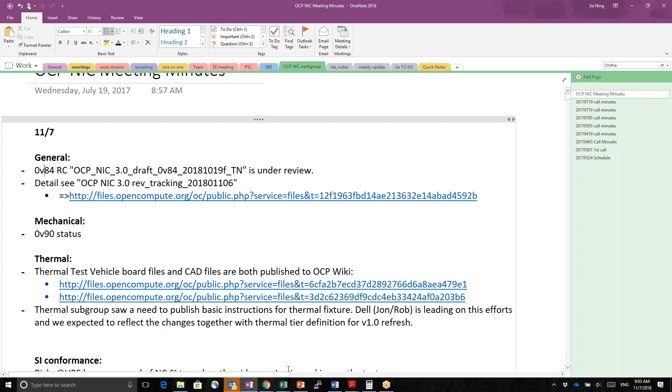Sure. John, as you mentioned, the 0.84 draft has been out for review for about a week, two weeks now, and I haven't received any comments on it. But since that was released, there was a discussion over the email threads for Goldfinger length.

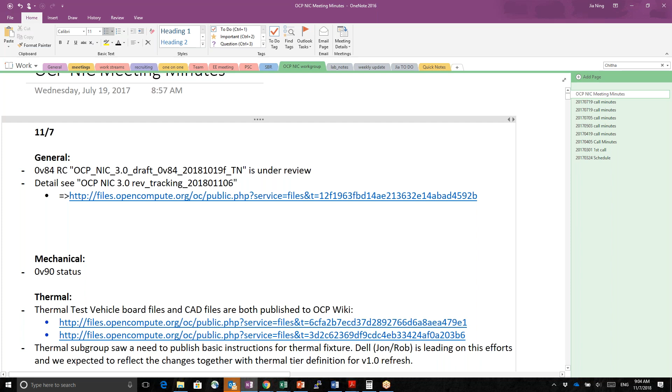So that's something that will be incorporated into the latest spec. You noted that in the rev tracking spreadsheet as the last item. I didn't receive any nays on the implementation yet. That's likely to pass.

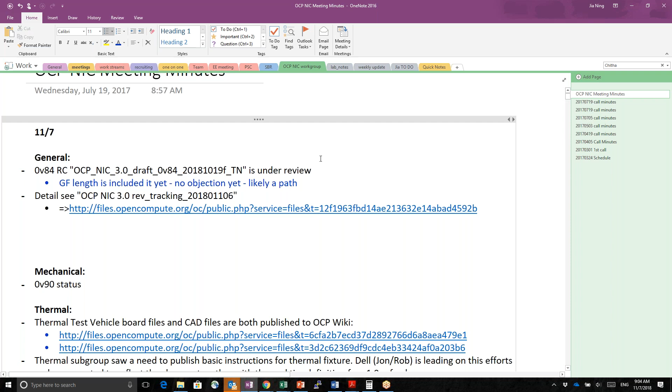Any other questions? Then along with that, I know Josh, there are some mechanical changes that we're working on within the mechanical group.

And some proposed text for the SI section that will concern length matching.

So hopefully those could all get in by, let's say, Wednesday to me, and I could publish an updated version for review as a release candidate. Wednesday, which day do we want to set? Friday, sorry, Friday. Okay, yep.

I know Jonathan Mai, from Intel's perspective, he's doing the drawing updates with Josh's direction.

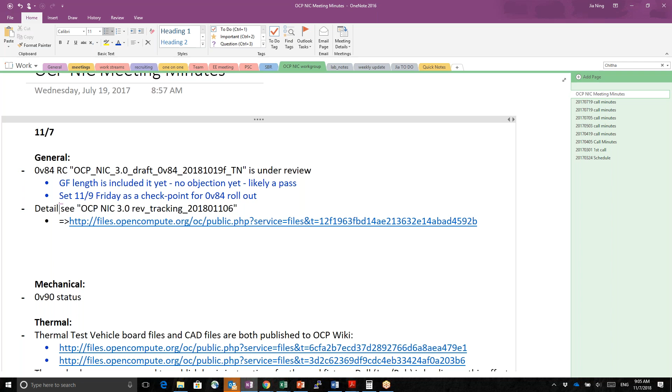Yeah, just to add to that quickly, I think we have a pretty good path to what's going to get into this next release. We know what we need to do, we just need to do it. So that's what we're actively trying to execute on right now.

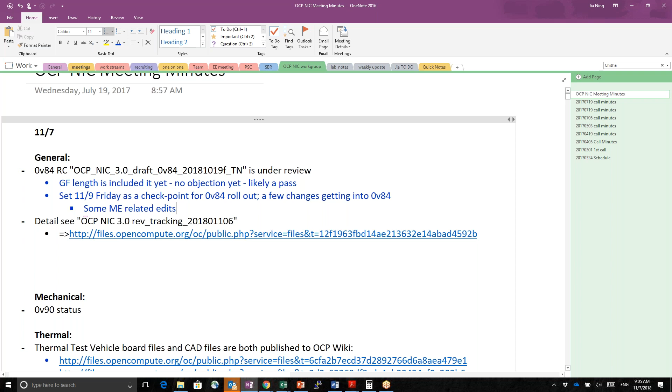There are a couple topics that we've been discussing that probably won't make this release because their scope's a bit larger than we'd like to try to squeeze in right now. So there's going to be some ongoing discussion around some other things.

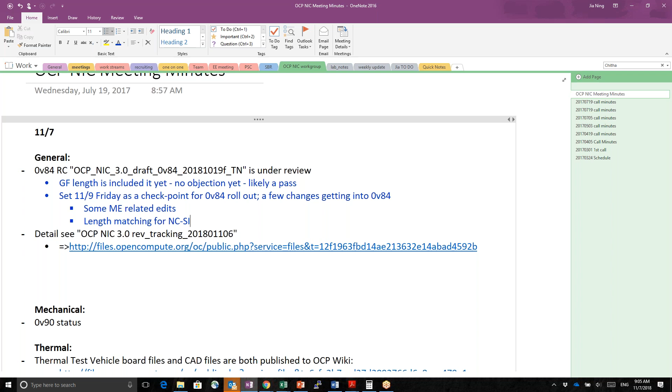Right, and then with regards to version numbers, in my previous email that I sent to the work group, I said the 0.84 would roll to 0.9 when it's released.

But just out of curiosity from the folks on the phone, is this really a 0.9 if we're missing like thermal tables, etc.? I mean, what's your guys' take on it? And I'll just name the file appropriately.

Yeah, I feel it's premature to call it a 0.9. And I think the 0.9 should be the point that includes, I think, both also signal integrity conformance.

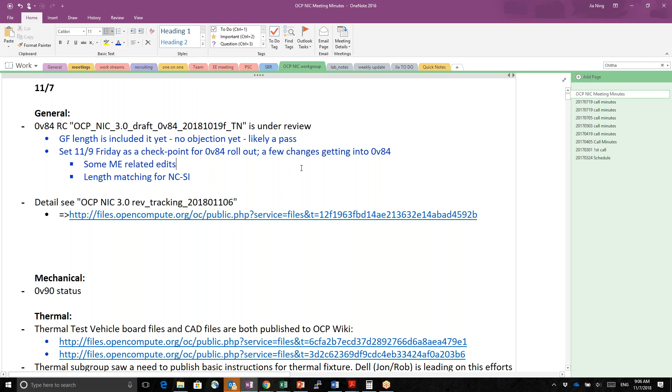Yep, okay. Then I'll hold off on going to 0.9. Maybe I'll roll it to 0.85, so that way it's a new number and people are not trying to use a 0.84 down rev. Okay, thank you.

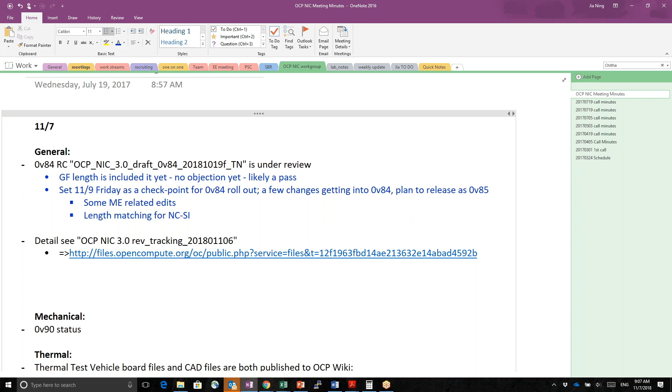Jia, one question on the self-shutdown, at this point we have all the changes in, right? Thomas, you sent out an email. We didn't receive any issue or further changes.

Yeah, I incorporated your proposed updates for self-shutdown, I think several weeks ago. And I asked the community to review it.

Have not heard any objections on that, so it will just be as is. It's basically your text with minor edits. The technical content's the same.

Yes, no, thanks for that. I was just looking for, did you get any additional feedback? It seems like at this point, I did not get additional feedback, objection.

Right? So it was quiet, so no objection. Yeah, no objection. Okay, thank you for the comment, Hamel.

So that's pretty much for the overall spec situation. So let's move to mechanical and see if Josh wants to give a quick update. Sure, I can do that. We have a few things changing, but none of the changes we're implementing affect the PCB at all. These are all external to that.

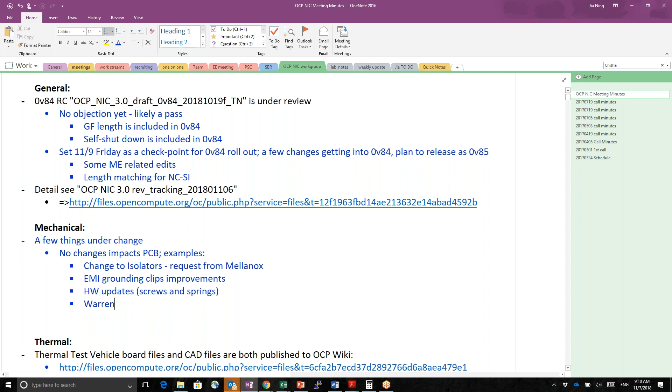Concerning screws, we've got a couple of sample OCP cards and noticed that some of them use different screws. Like one has a Torx screw, one has a Phillips screw. I'm not really familiar with the mechanical section there. Is that something that is specified and I'm just seeing outlier parts?

So you should not have a mix of Torx and Phillips. The only things included in the spec today are Phillips, so somebody isn't building per our recommendations. Okay, but it is defined in the mechanical section that they're Phillips? It is. If you look at the mechanical section, there's actually a complete BOM that defines part numbers that we intend to be used to build these, and those part numbers track to Phillips only today.

Okay, I'm just not familiar with the mechanical section enough to know. I figured it would be quicker to ask. Sure, and Warren, if you want additional details around those components, just reach out to me and I can help you out. Okay, thanks. Yeah, no problem.

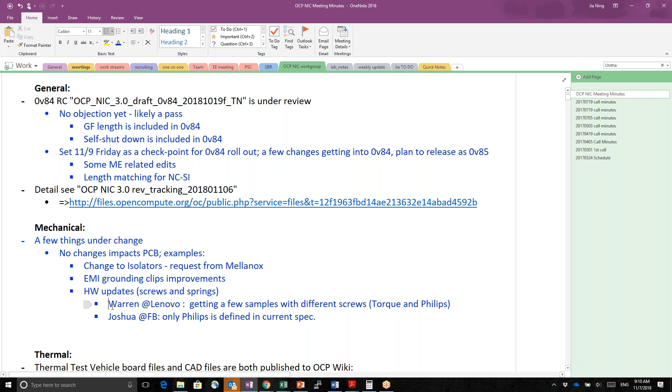There will be new 3D CAD that we'll also be publishing here shortly. I have to generate it. It's basically just very minor updates, and the mechanicals involved in the call are aware of all the details, so I won't go into them here.

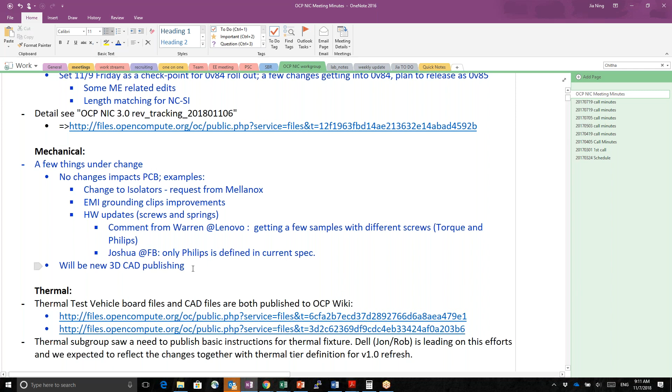So thank you for the update, Josh. And for the version control, do you have a suggestion of which version the 3D will roll to? You mean if it's either 0.85 or 0.9? Is that what you mean? Yeah, the version that we will use.

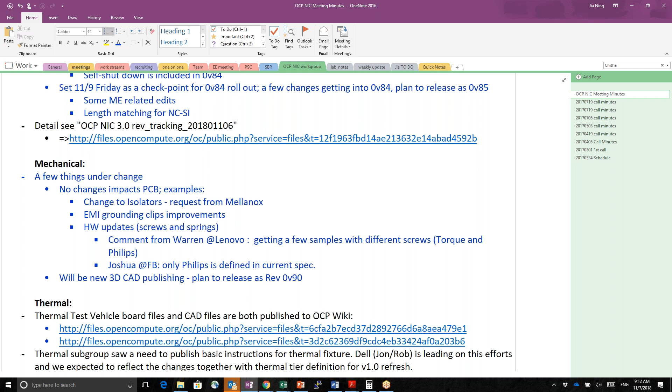Yeah, I'm actually, we're pretty confident with where we're at today. I'd be comfortable going to 0.9. That's my personal opinion, we're pretty mature. The couple of changes we're talking about right now could be rolling changes. I don't anticipate it to really drastically change anything. The types of changes we're talking about are very detailed at this point.

Okay. So I'm open to do it, and I just want to hear from the bridge if there's any concern of having the mechanical reach 0.9 ahead of the main spec. Hope that doesn't cause confusion, but I do see the point of having 0.9 to show the maturity of some part of the spec instead of the whole spec.

Just to be clear, I think that I could do 0.9, but I would like to sync whatever I do to whatever the overall program is doing, just so it's very clear. So I'm flexible either way. I just want to give you my opinion on the maturity that I've seen from my perspective.

Okay. Then in this case, I may suggest going with 0.85 to sync with this month's push. Okay, which I think is more straightforward for the community when they take it, and avoid confusion of why they are different. Yep, no problem, I can certainly do that.

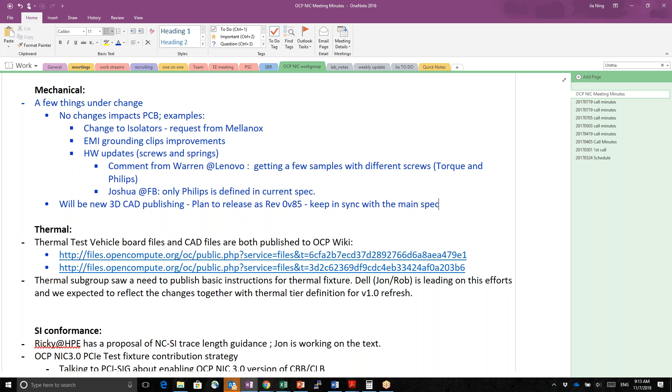Okay, so next one, I'm moving to the thermal, and is Yuemi on the bridge? Yes, okay, I'm here. Yep, thank you.

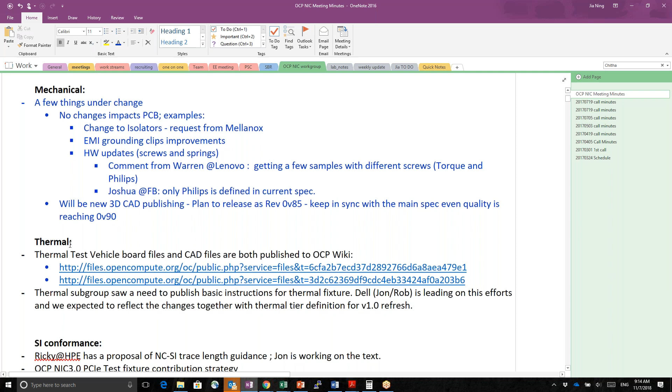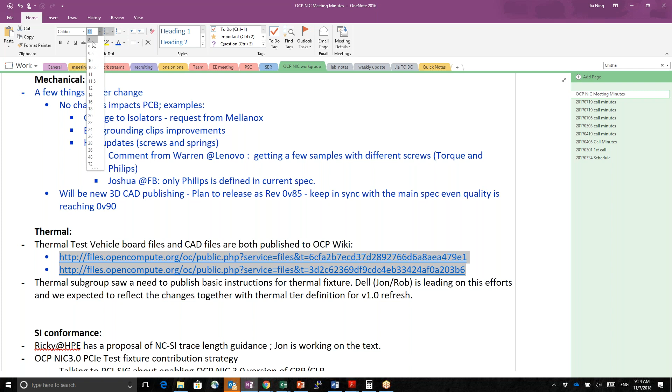So for the thermal side, actually this time we posted the thermal test vehicle, both the board files, like the tables we're using, and also the CAD files. And I think Rob and Jon from Dell, they actually sent some samples to most of the companies. So if you do have a chance to get it, take a look, and if you have any questions, feel free to ping us on the group.

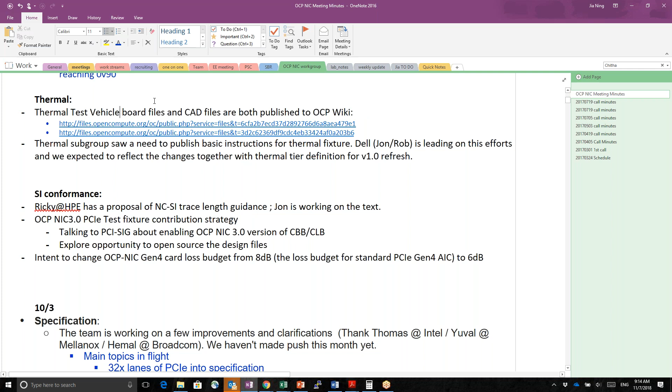And also we do see some need to publish a basic instruction on how to use this kind of fixture. We are thinking to include that together with the tier definition. Since now we don't have too many real cards coming out to do real testing, we are thinking maybe on the version 1.0 refresh we will include all the details into the newest thermal refresh.

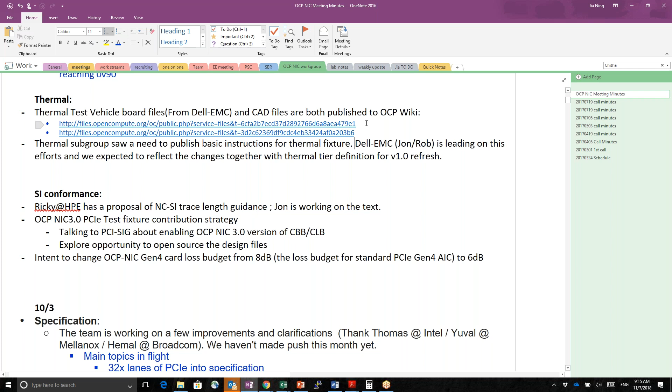Any question, comments? All right, move forward.

Before I try to cover for submit, I just want to make sure he's not on the bridge. Yes, he's not on the bridge.

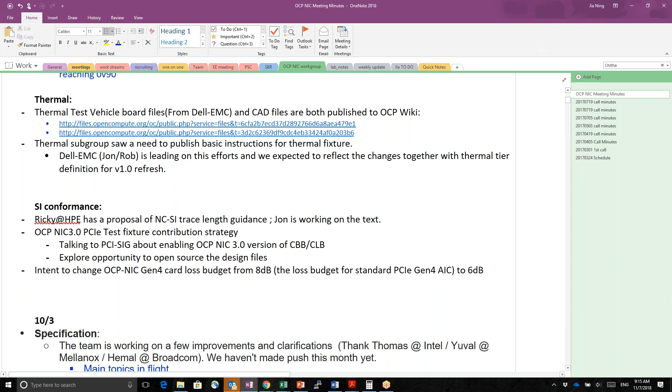Here is a quick update I got from submit through meeting minutes, simplified version. I see someone more involved with it, like Jon from Dell is on the bridge, so feel free to chime in. On a high level, there's a proposal of NC-SI trace lengths coming in, and Jon from Dell is working on the text.

Hopefully that can get into the 0.85 version going out, maybe frozen this Friday and released early next week. The second thing is about the PCIe test fixture contributing strategy.

Summit from Facebook is actively discussing with PCI SIG and trying to find a path. The key ask is to see if PCI SIG can enable the NIC 3.0 version of CBB and CLB while still having some openness to open source design files. But this is still an ask, so we haven't seen a line of sight to having PCI SIG commit to that.

Meanwhile, I'm aware that Dell has gone fairly far in having their CBB and CLB and is willing to contribute. I'm in Taiwan this week.

I also noticed that at least one of Facebook's ODMs has already made their own CBB and CLB. So I take it as a sign that adopters actually have a timeline to have a working CBB and CLB for their system and card validation.

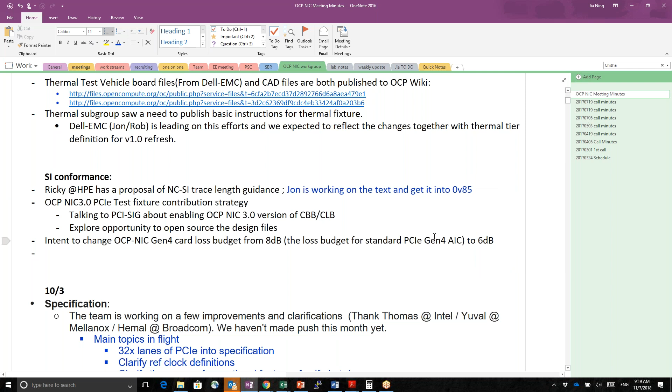Is there any question, comments? Do you see some difficulty during designing? I believe many of you are doing it. Feel free to either use the mailing list or this call to highlight something that concerns you.

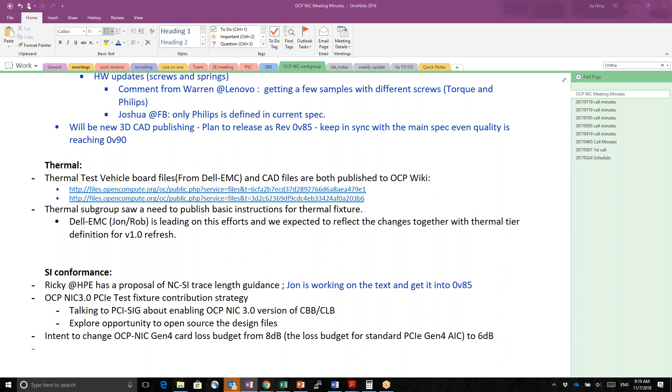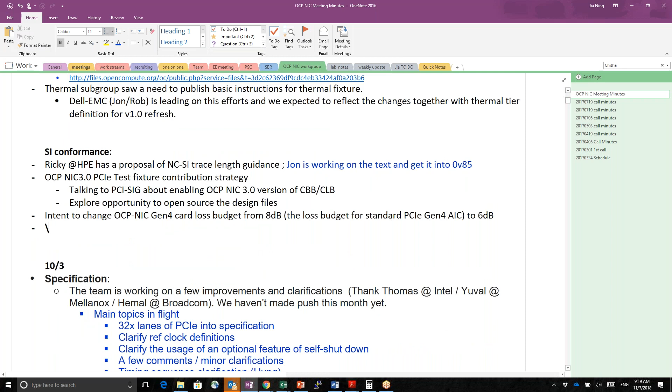All right, if not, I think we will just... How far are we away from -- this is Paul, can you hear me? Hey Paul, I can hear you now, thank you. Great, how far are we away from completely filling out the thermal class tables with all the numbers?

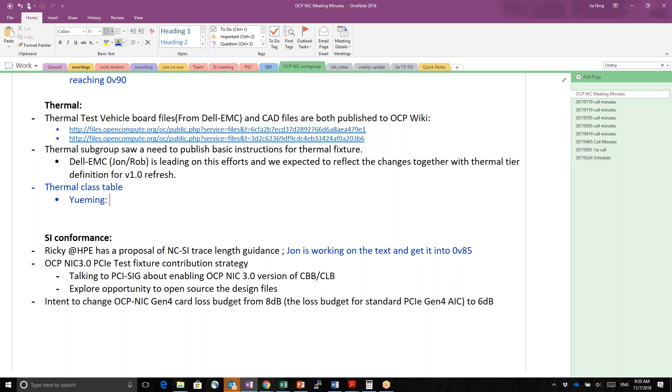Yeah, Paul, so this is actually an ongoing effort. We definitely want a few cards to be tested so that we have a consistent definition of how the tiers look like. Currently, we don't have so many vendors giving us sample cards, or we don't have too much understanding of how thermal will look like.

So I'd say, probably just give us a little bit more time on the implementation side, and then we can get that into the spec later, once we have more understanding and more cards to test with. Okay, so how much later?

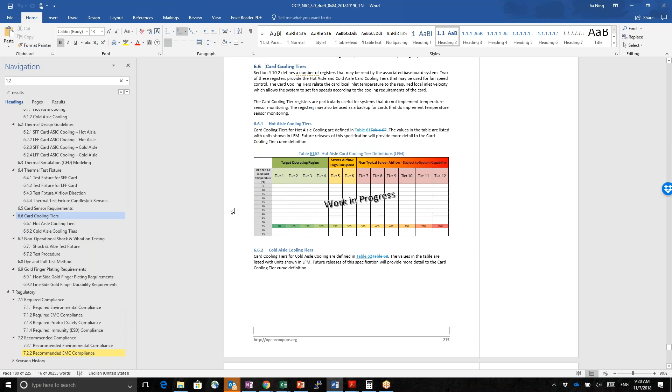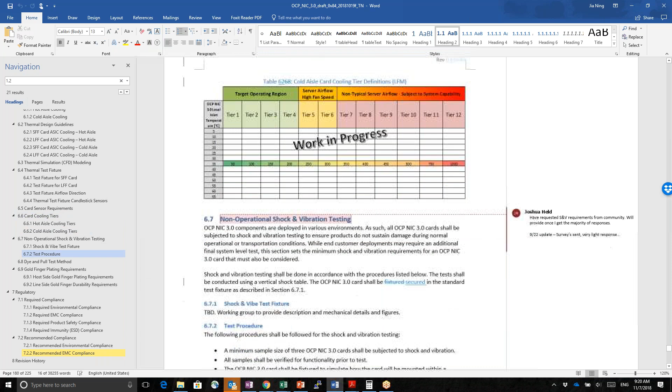Do we have an idea? Yeah, I think last time we said Q1, Q2, 2019. I'm not sure, let me go back and see whether by that time we'll have multiple samples to test. I think one of the issues is we do need some community support around this. We don't actively have platforms here at Facebook under development, so we need to get the community's help here.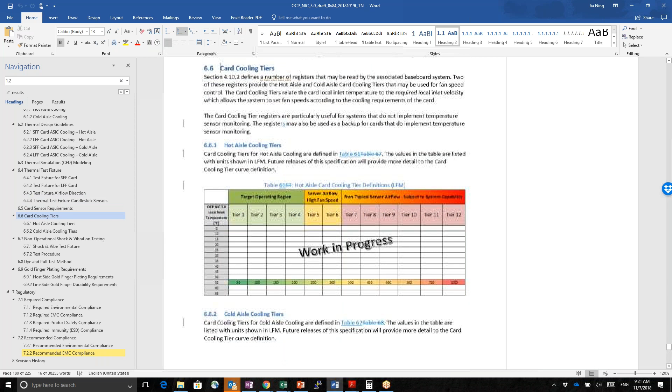It's a kind of interesting chicken and egg situation - in order to really have a final NIC, I need to make sure I put my NICs in the right place on this table. But in order to get the NICs on this table, you need the right final version, you kind of understand where we are.

Yeah, exactly. So maybe Intel also has the test fixture and vehicle. If you have cards, test it and let us know what's your thought on this. And then we'll gather multiple vendors, multiple inputs, and we can definitely go ahead and define the tiers. Got it. Hopefully we can do it sooner than what you're hoping, but I get what you're saying.

Yeah, thank you for this question. I want to understand better from my point of view. It seems like there may be people making their own card samples. So how does it work? Does someone test their card in their own setup and report the data back to the OCP NIC community, or do they submit the card as a testing vehicle or fixture for some centralized lab to gather data together? How does that work in reality?

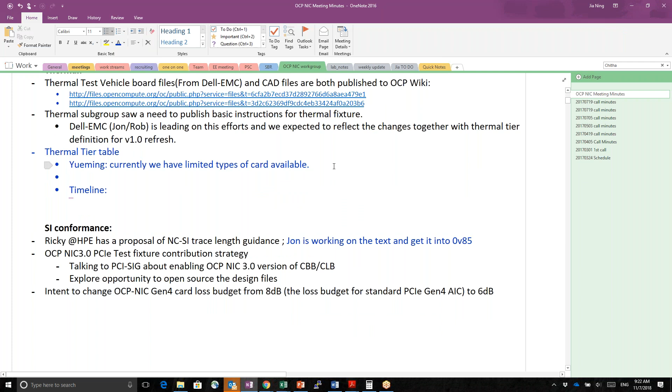Yeah, so currently we do have a standardized test fixture. We hope that all the vendors can use that test fixture. Let's say I can work with Jon and also Rob from Dell - we can put together some initial guidance of how people will use this test fixture so that the test can be repeatable and also an apples-to-apples comparison.

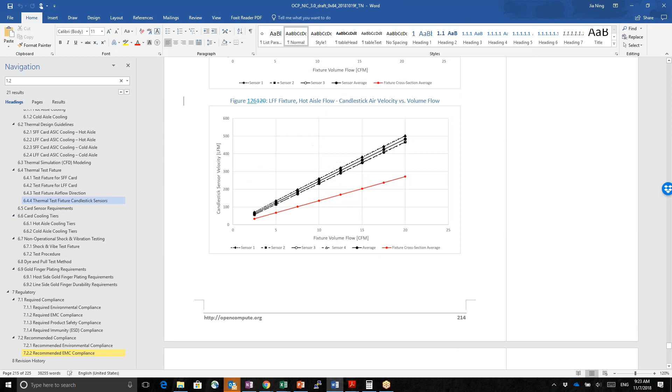So I think that is the first step, and once people follow this instruction and do the real testing, it can be reported back to the OCP subgroup of thermal. Then the core team will decide, based on all the test results we have, what are the tiers - can we divide it into a more narrow band, or does it need to be a broader band. So that's basically how I envision this procedure, but definitely if people have more suggestions on how to make this quicker and more reliable, just let us know.

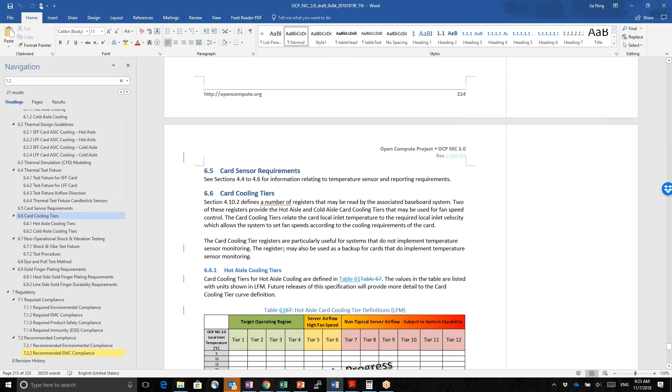Okay, and a follow-up question is, do we want to have a very granular approach - if we look at 12 tiers here, are we looking at a very wide spectrum of samples, and for every supplier or manufacturer of that sample to do some testing and provide data and report back for us to fill in this table? Is that how we envision it?

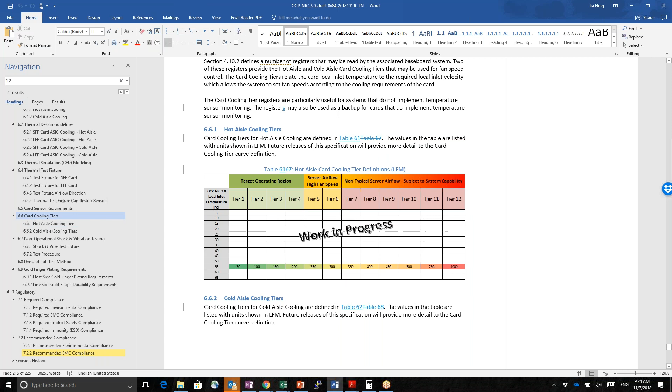Yeah, I think so, this is one way we can do it. Because nowadays Facebook doesn't have a very aggressive timeline to implement the NIC into our platform, so help from the community will definitely help to speed up this table.

Okay, I see. So this looks like a somewhat open-ended system to get all the data, because it purely depends on how many different cards people are enabling, what's the timing, and are they doing a test and sending the result back to you. So pretty much we are hoping this happens, but it's really hard to tell if we have visibility, for example. Yeah, exactly, there are so many dependencies - once we get the results quicker, we may get this quicker as well.

Okay, so maybe we can take it offline, but maybe we can brainstorm a little bit, trying to see if there's a way for us to cover with some fixture or thermal testing vehicle for the NIC to come out with the profile, but I don't feel we'll be able to really get into the meat of the detail here. Okay.

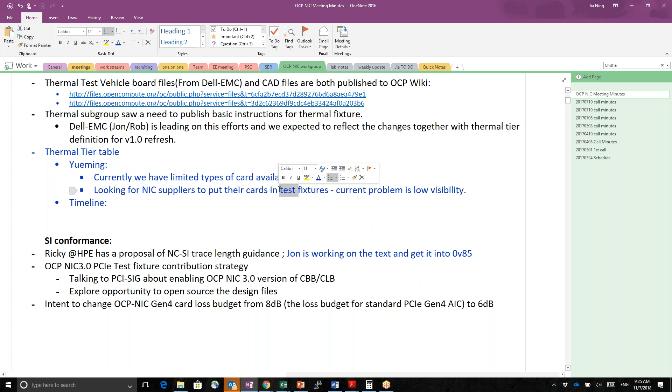I think we're motivated to help make this happen. Jonathan is here also from Intel. Jonathan, can you share when we plan to provide our data?

Maybe he's going to stay muted and not respond. Okay, he's still muted. All right, sorry, can you hear me now? Now I can hear you. Okay, thanks, sorry about that.

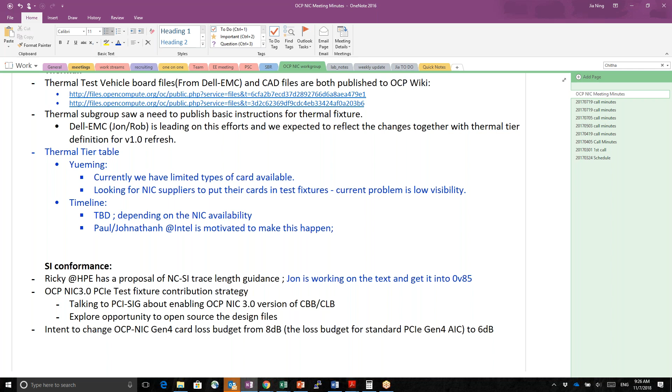So there's a couple of limitations, which is equipment on getting the thermal fixture fully functional. We have some supplier issues, for example like the anemometer, the candlestick right now. We're still waiting for the supplier to send it to us because we don't have it, and it takes a while for them to make it.

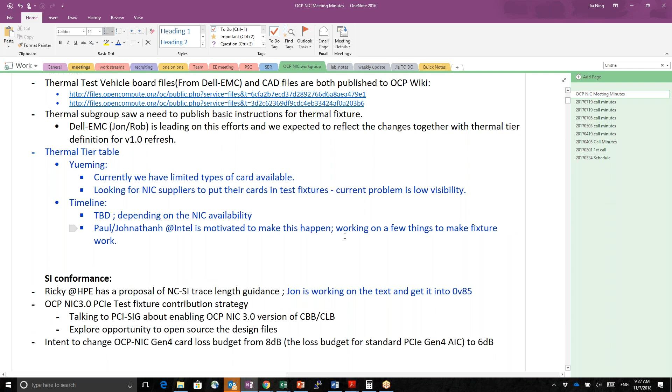That's one of the things holding us up. The other progress is we got the fixture working, and the board that John provided to us working as well. We just got that up and running. Yesterday I was spending time in the lab getting it all up and running. So now we're in the process of calibrating and getting the board in to start measuring data. That's where we're at, but we're still waiting for the anemometer to get in so we can correlate LFM to the actual thermal data.

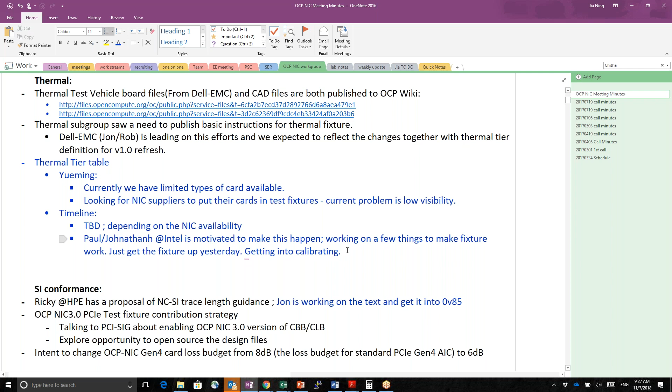I see. Jonathan, for the anemometer, you mean like the candlestick sensor, right? Do you think it can help if all the vendors or subgroups place an order together, so if the quantity is big enough it will speed things up? I can coordinate on that if that's helpful.

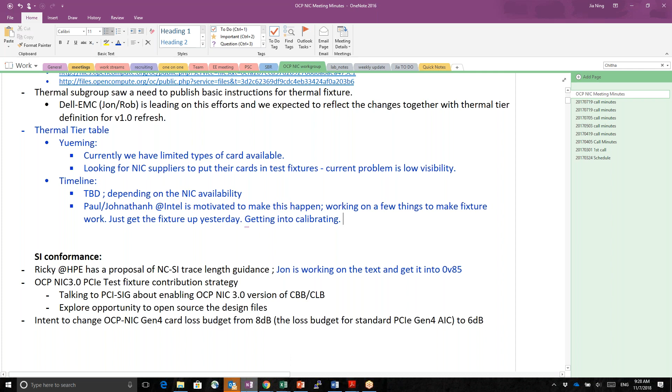Yeah, a while back, you saw my email maybe about a month ago, that was the challenge, and I was trying to work really hard with the supplier to pull in the lead time. But it seemed challenging. However, they're saying they're shipping out yesterday, but I haven't heard any update yet, so I'm still trying to follow up with them. That's why any help would be really appreciated.

Okay. So then Jonathan, are you using your own card for testing, is that what's making the fixture functional? Yes. Okay, so there's still not a test vehicle card that's out there for this function yet.

Sounds like not. Yeah, it's a working card, not a thermal testing vehicle. Jonathan may help confirm, but that's what I hear. That's correct, yes. We may look into designing one, but we need to get resources for that.

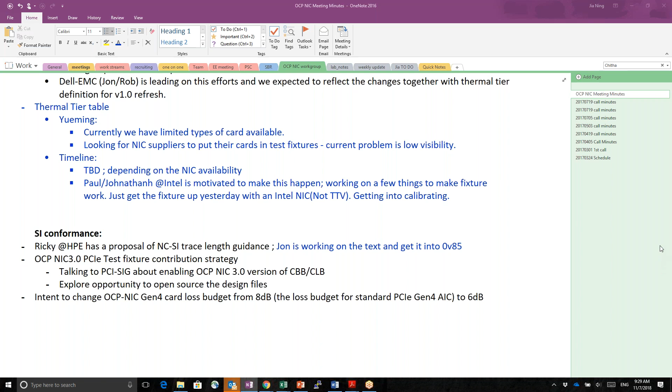If anyone is working on a thermal testing vehicle, I think it would definitely be worth talking about it, and this will likely be very helpful for us to define the tier table without a dozen different cards happening to land at the right place.

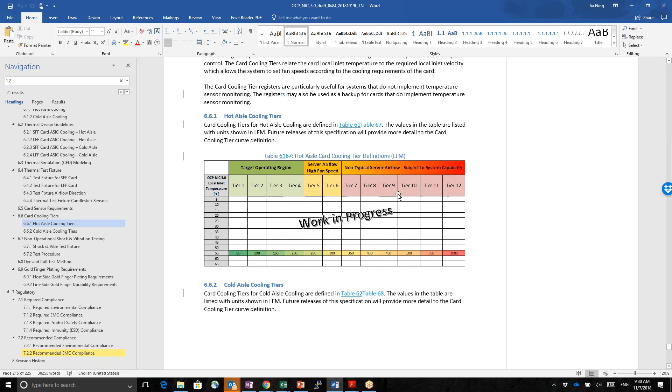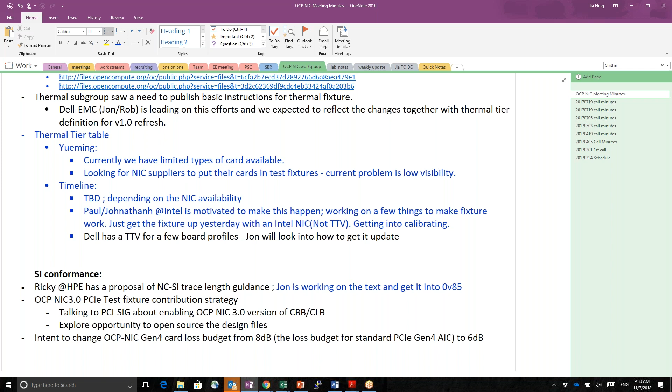So Dell developed a thermal test vehicle for a couple of the board profiles. Let me see what it would take to get that, share it, and maybe update it, because I'm sure other people here would probably have some opinions on what they'd like to see. Okay, thank you.

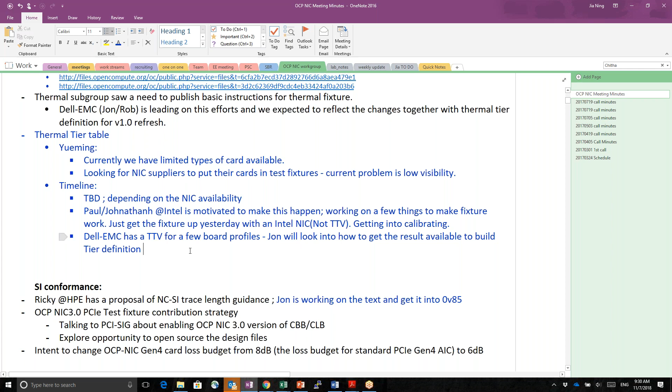Jonathan, one more question, are you using any of the onboard connectors that are on the fixture, the USB and the RJ45, or are you just running a signal through a system board that you've got plugged in?

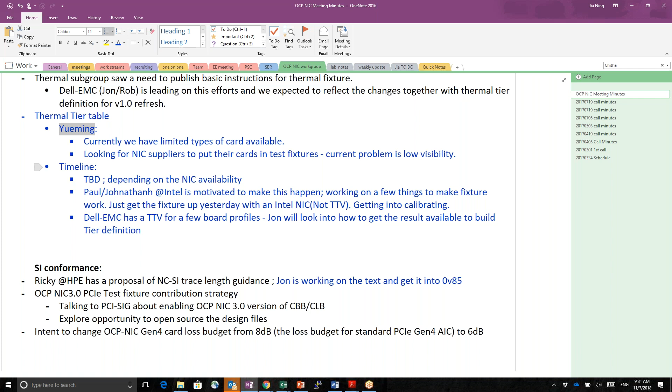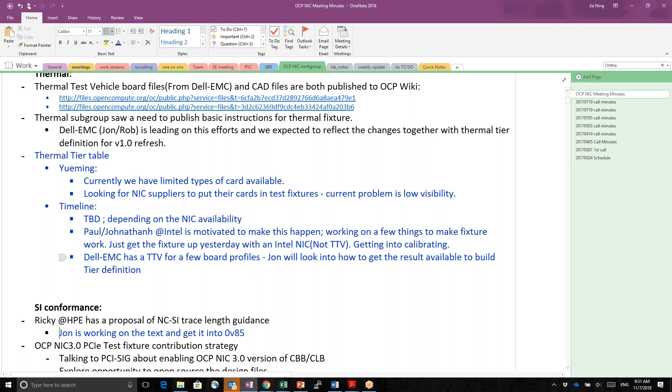Right now I don't have any instruction on how to use those USB or RJ45 connectors, and I believe that was my question to the thermal community earlier, is there instruction on what to use for that? Right now what we're doing is just basically taking that fixture and plugging it into our own system and running our software to exercise the thermal limit of our card, then making measurements from it.

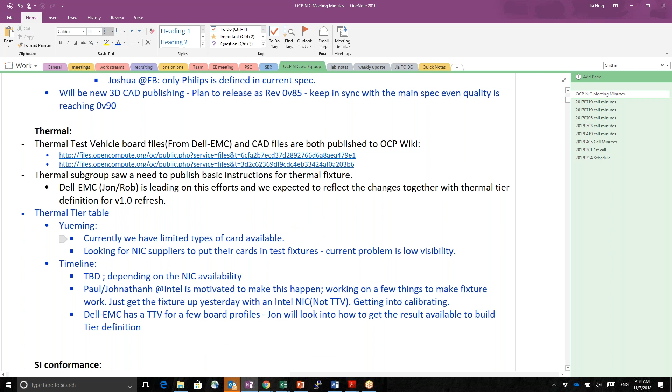Right, does that answer the question? Certainly does, and it brings up what Jonathan had mentioned before about, at least at some point, if it's not included in the spec, possibly an offline set of instructions or setup conditions using those onboard connectors, just to understand what kind of signals we need to send and how that's going to work.

Yeah, Carl, you're right, I'm delinquent in providing that to the group, and I'll see if we can get something next week. If you have a specific question on it, just send me an email or give my cell a call and we'll talk through it. Okay, sounds good.

Okay. Any other discussion, questions, or comments? Just like the thermal topics we just talked about.

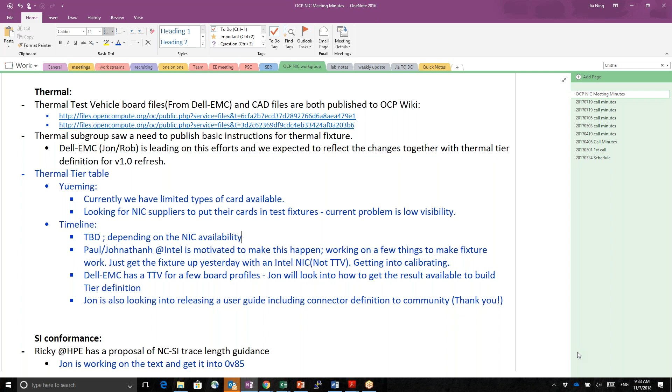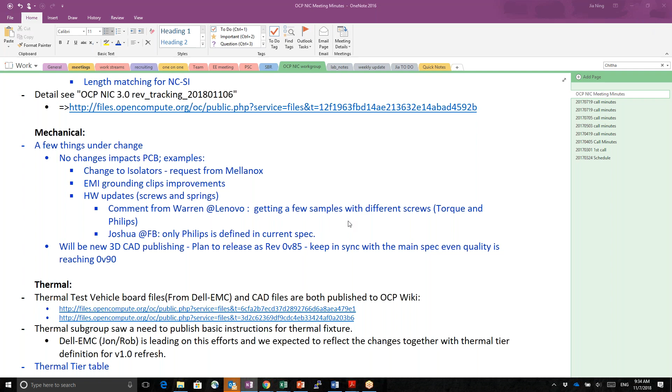All right, okay, thanks, John. Thank you, thanks John, all right. Thank you, have a good one. Bye-bye. Bye. Bye. Bye.